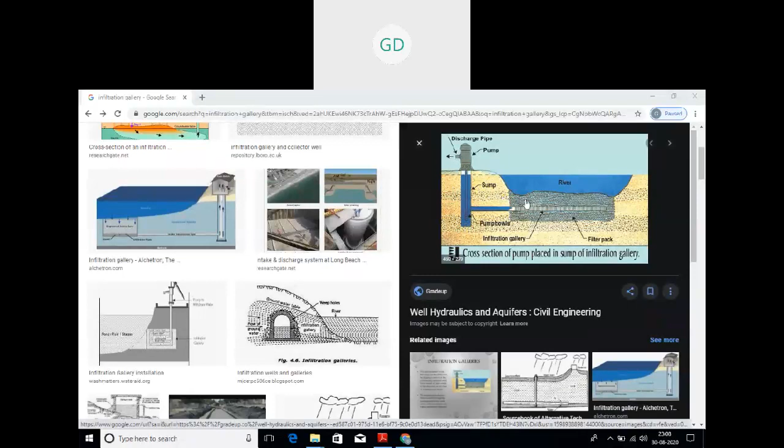So this is the picture, can you see? Here, this part is a river. This is underground, and here you see this tunnel type thing, it is your infiltration gallery. It takes water from the river, the water that seeps through the soil from the river underground, and takes it to a sump tank. From there it is pumped and the water is finally taken out. So that is an infiltration gallery, meaning this is also a source of supply, from there water is taken.

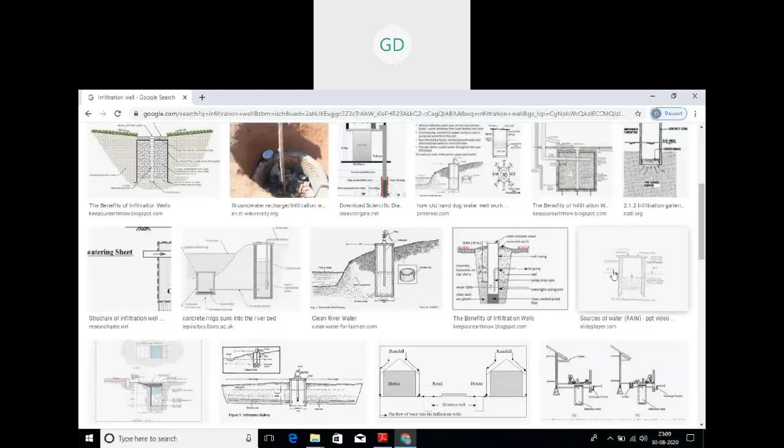Similarly, your infiltration well is a similar thing, but it is vertical. Let me show you broadly, you will learn this in hydrology. This is the section of an infiltration well. Here is the ground level, here the water table is, and this is the water - the lower part is open and the upper part is covered. Here also the water gets accumulated by infiltration, and from here the water is taken to your sump tank and from there it is pumped out.

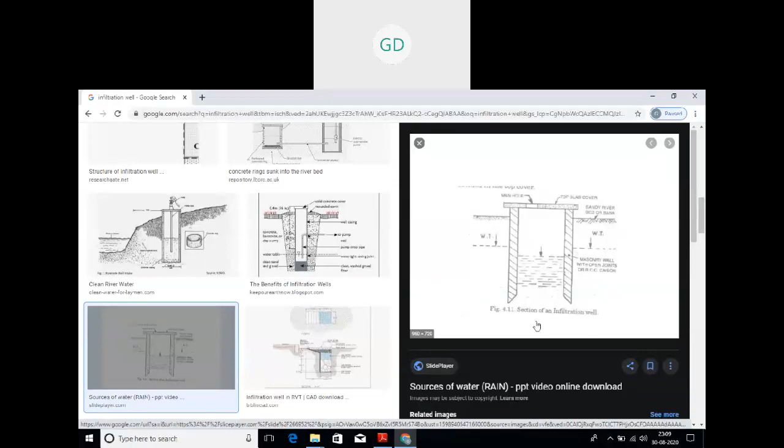So these are your sources of supply, just remember the names. Definitions won't be coming, I guess, but generally you need to know what it is. Wells and tube wells everyone knows, so I won't be explaining this one, you just remember these things. If you want to write it down, you can, or you can take a screenshot, or you can find it in your ERP.

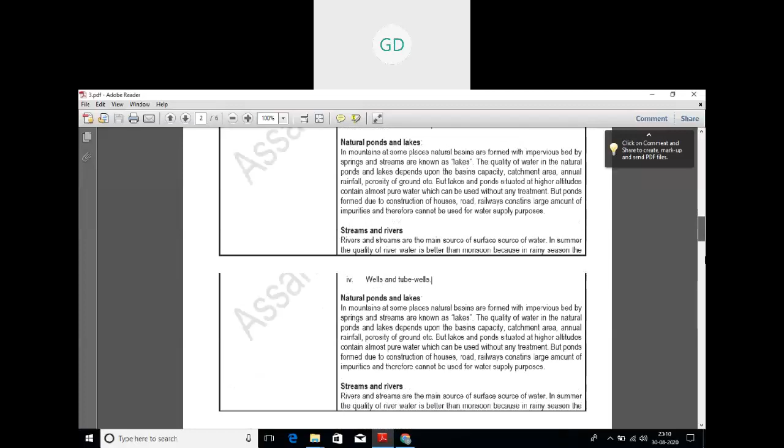Next we will go to reservoir, storage zone, and uses of reservoir. Let me show you in another one, just wait.

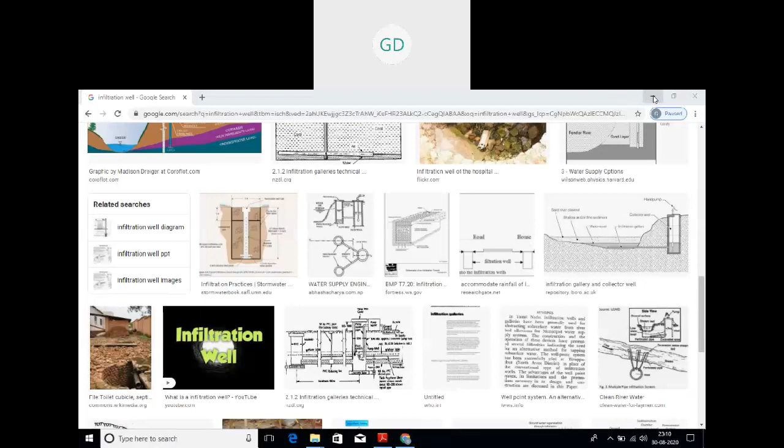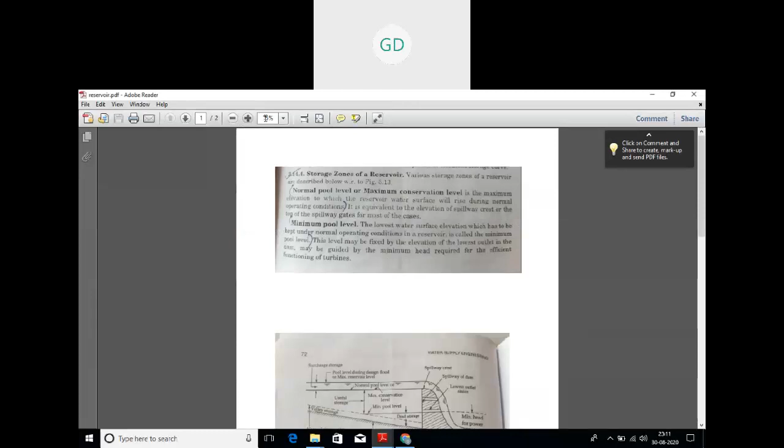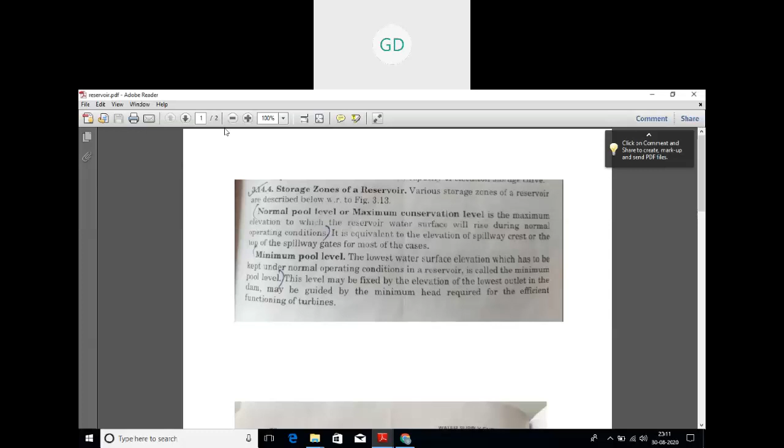So the next topic is storage zones of a reservoir. Please take a screenshot of this one, I have given this from the book. So take a screenshot first, then we will start explaining.

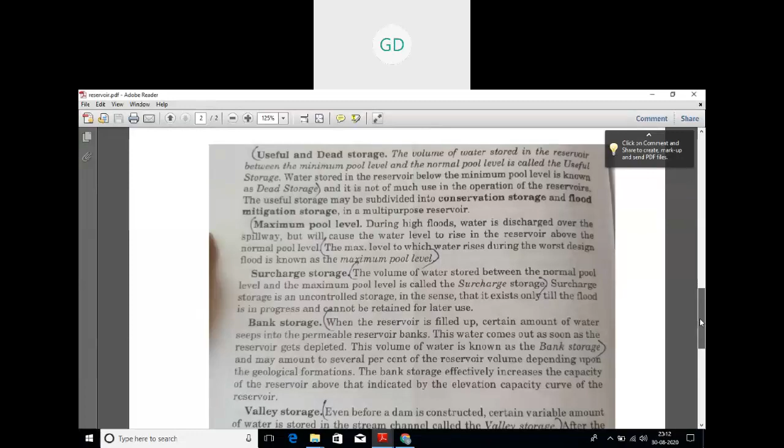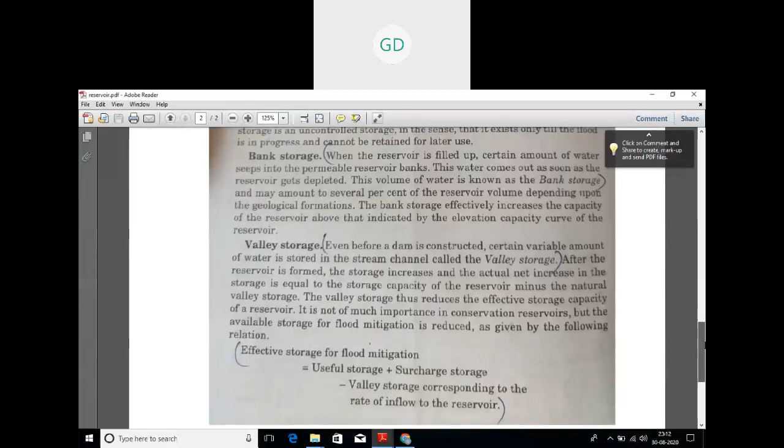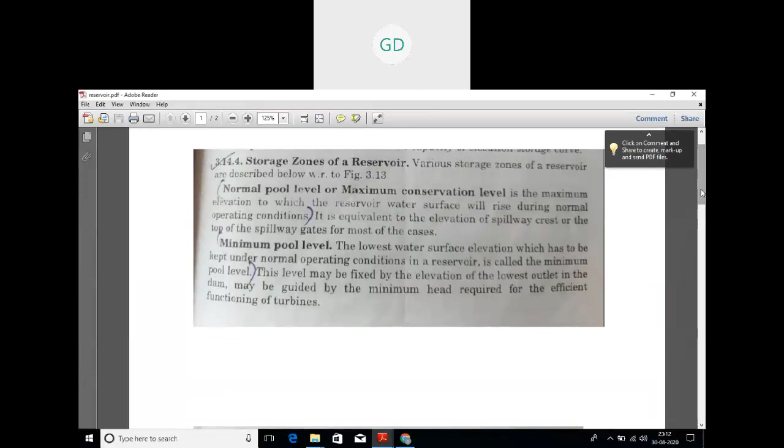So let's see, what is a reservoir we already have discussed. Now let us see what are the storage zones of a reservoir. There are certain zones. So this is your storage, this is your dam - this part, I guess you can see my cursor. So this part is a dam, and we have certain zones here. Let us see what these zones are.

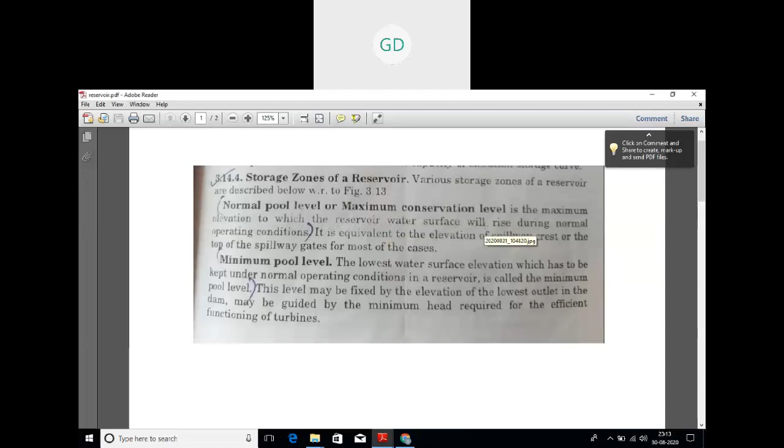The first one is your normal pool level or maximum conservation level. What is it? It is the maximum elevation to which the reservoir water surface will rise during normal operating conditions. Let us see in the picture - here is your normal pool, see this line, this is your normal pool level or maximum conservation level. This is a dam.

Okay, this part is your dam. So up to this part means here it is a water level. In normal conditions also, the water will rise up to here, the water surface will rise up to this line. So this line is known as what? Normal pool level or maximum conservation level.

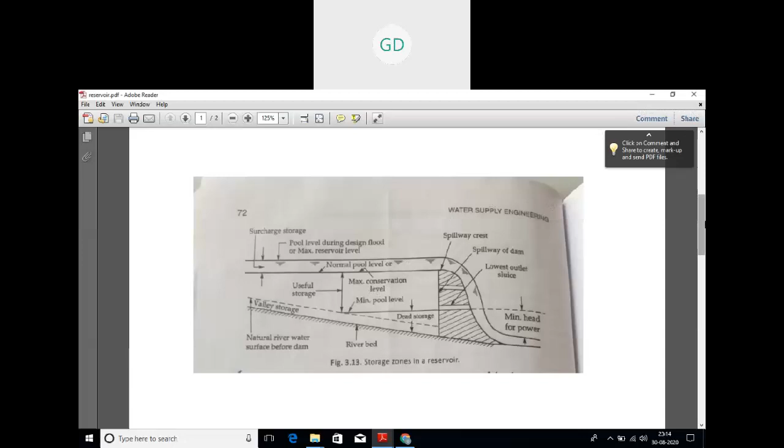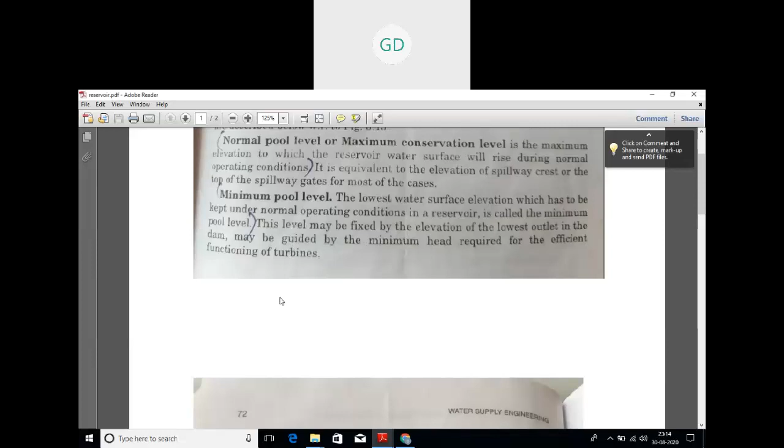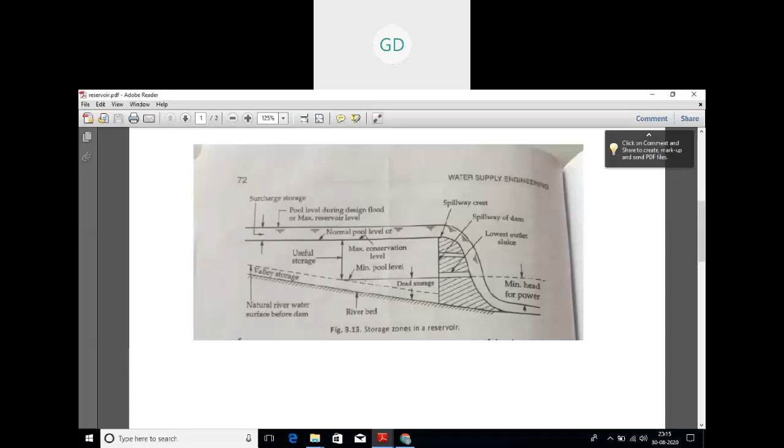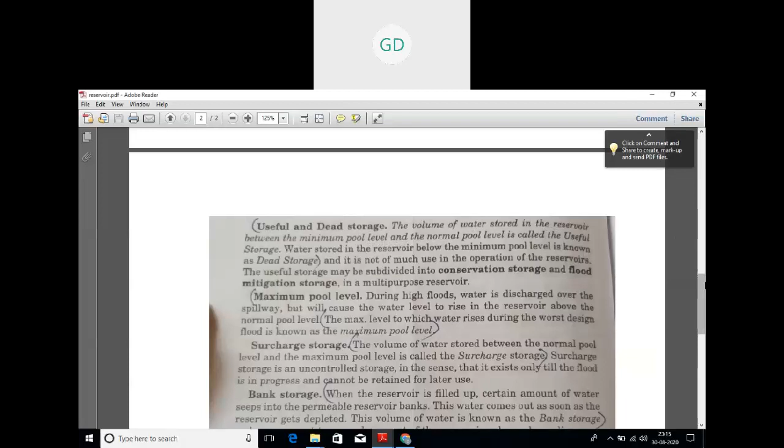Next let us see what is useful storage. The volume of water stored in the reservoir between the minimum pool level and the normal pool level is called the useful storage. This is your normal pool level line, and this is your minimum pool level line. So the volume of water in between is known as your useful storage.

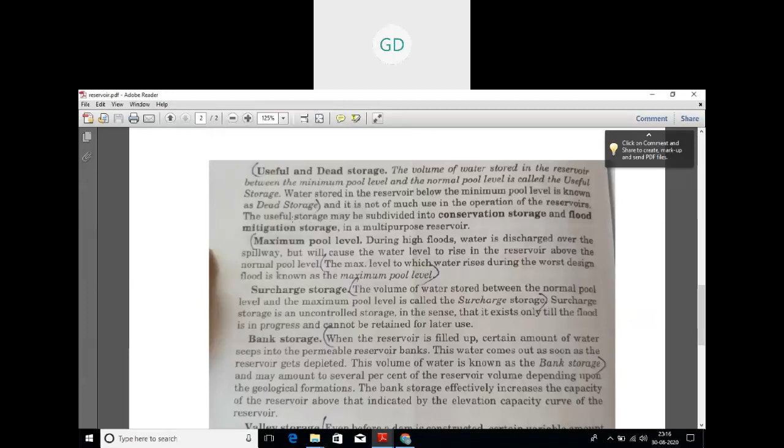Next, let us see what is dead storage. Water stored in the reservoir below the minimum pool level is known as dead storage. The water should be stored up to the minimum pool level line under normal operating conditions. So the water below this level is known as dead storage. That water is mixed with silt, gravel, and all those things, so it is not of much use. That is why it is known as dead storage.

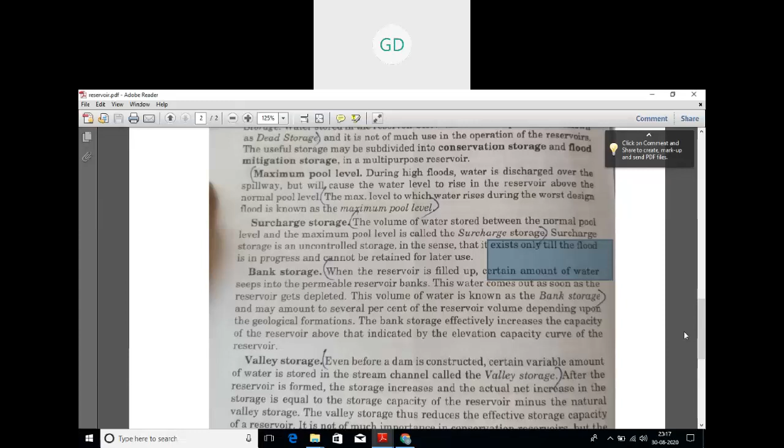Next is your maximum pool level. During high floods, water is discharged over the spillway, but this will cause the water level to rise in the reservoir above the normal pool level. The maximum level to which water rises during the worst design flood is known as the maximum pool level. You can see this line above your normal pool level, overflowing the spillway, which is the end part of a dam. So in the worst scenario, like when a flood is happening, the normal pool water level rises to this level, which is your maximum reservoir level or maximum pool level. That means up to that level the water may rise during the worst scenario like floods.

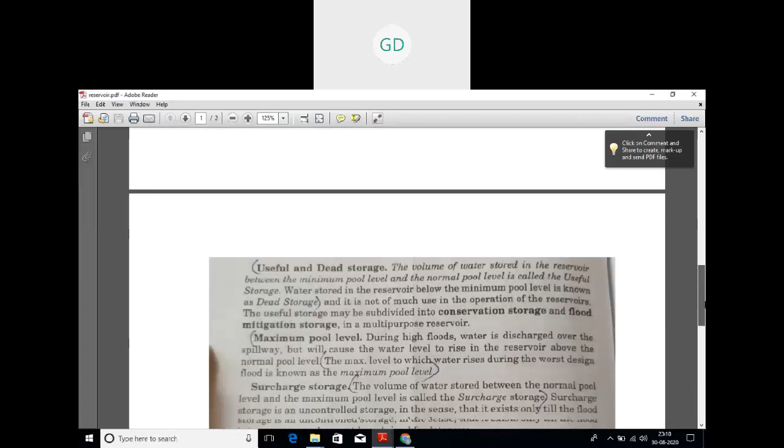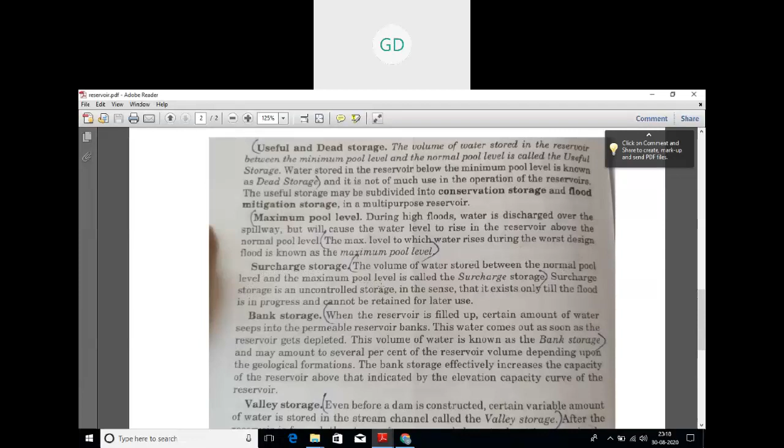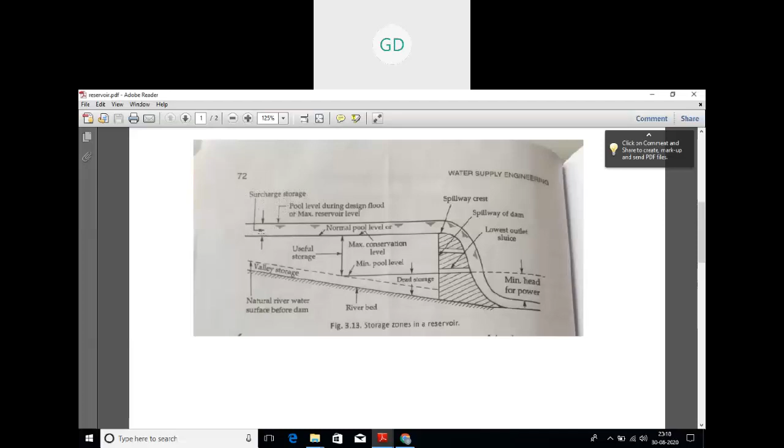Next is your surcharge storage. What is surcharge storage? The volume of water stored between the normal pool level and the maximum pool level is the surcharge storage. Normal pool level is this one, and the maximum pool level is the line above. So the volume of water between the normal pool level and the maximum reservoir level, this part, is your surcharge storage.

Let us see what's next: bank storage. When the reservoir is filled up, a certain amount of water seeps into the permeable reservoir banks. This water comes out as soon as the reservoir gets depleted.

This volume of water is known as bank storage. When the reservoir gets filled up, a certain amount of water seeps into the banks. That water comes out as soon as the reservoir gets depleted. That water is known as bank storage.

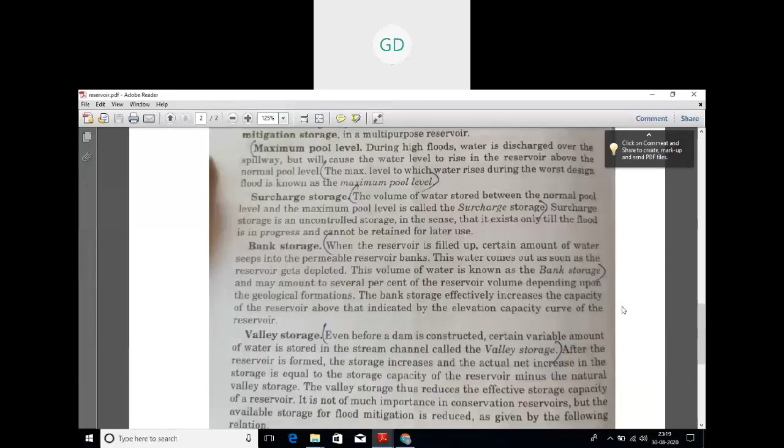Bank storage, I think it is not shown here. It is not shown here.

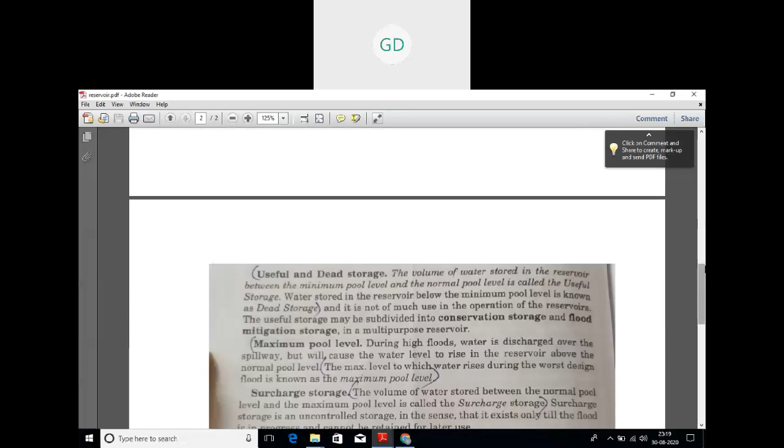Next is your valley storage. Valley storage means what? Before a dam is constructed, a certain amount of water is already stored in that stream, and that is known as your valley storage.

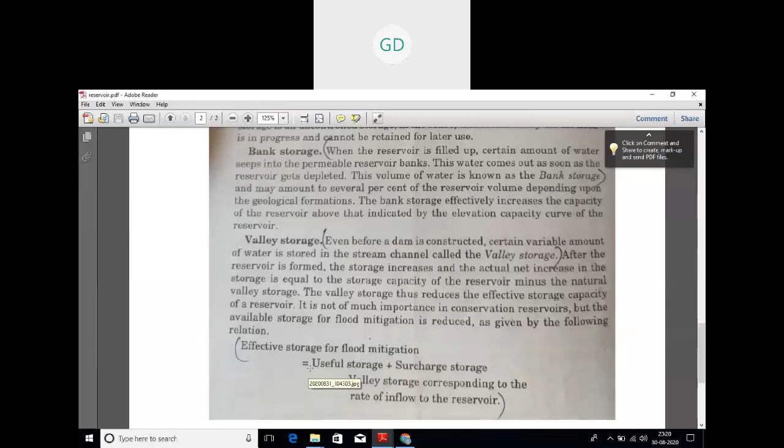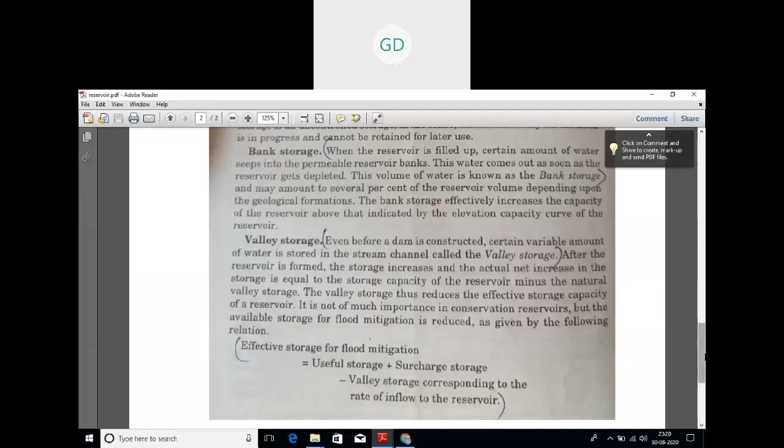And for valley storage, we have one effective storage for flood mitigation formula. In this formula, you can remember these things, you will get in your hydrology, much similar to your hydrology syllabus. So that's all about these storage zones of a reservoir.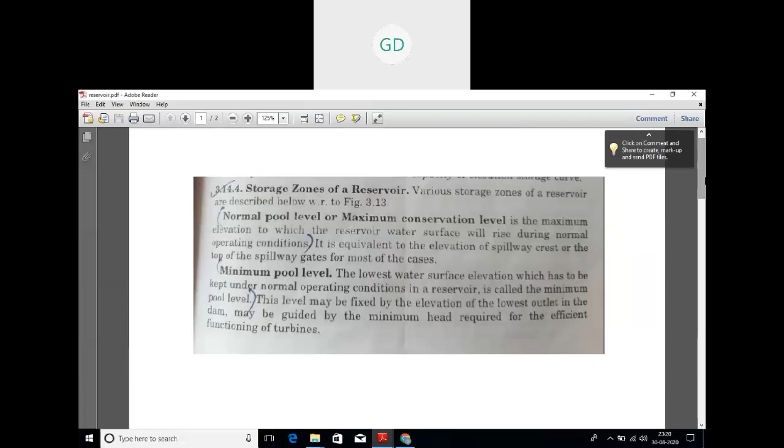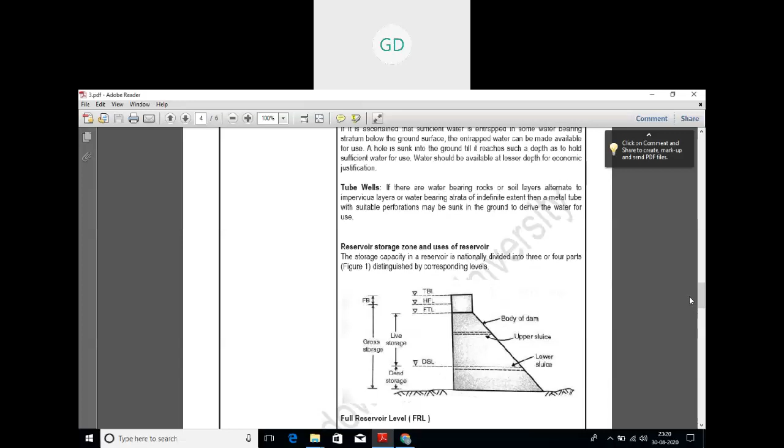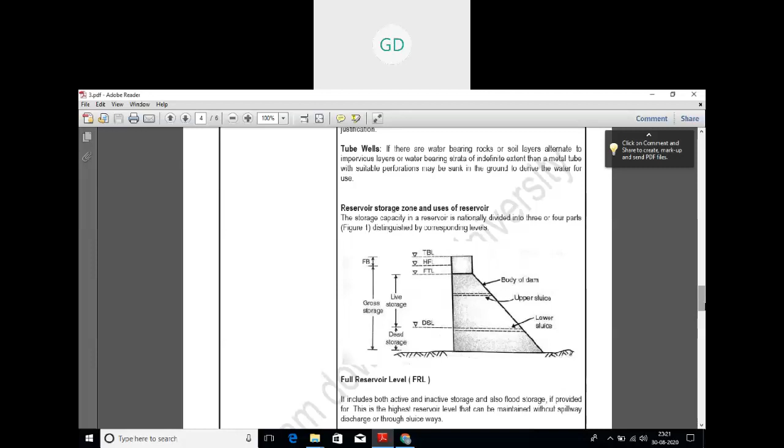Okay, this one is done. Next.

Next is your intakes for collecting surface water. This name intake, I have been using this one from the first class, I guess. So what is an intake? I don't have a picture.

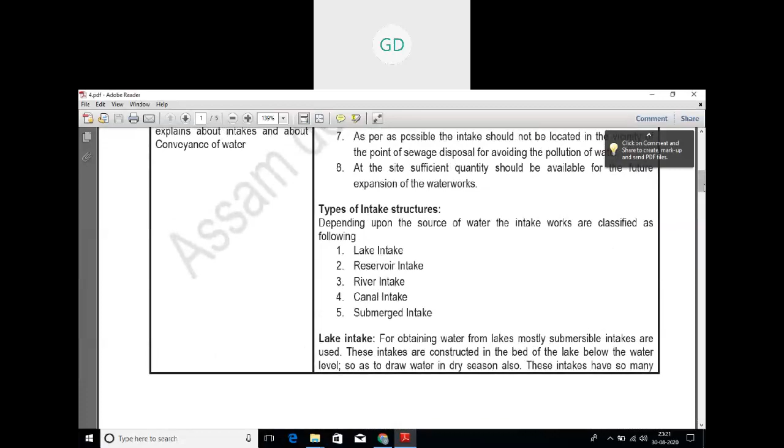No problem. So what is the intake? The function of our intake is to collect the water from the source, and then it discharges it to the conduit. Conduit means it's a pipe. So it discharges it to the conduit and then it is taken to a treatment plant. So the basic function of an intake is to collect water from the source, discharge it to a conduit, and then the water is taken to a water treatment plant.

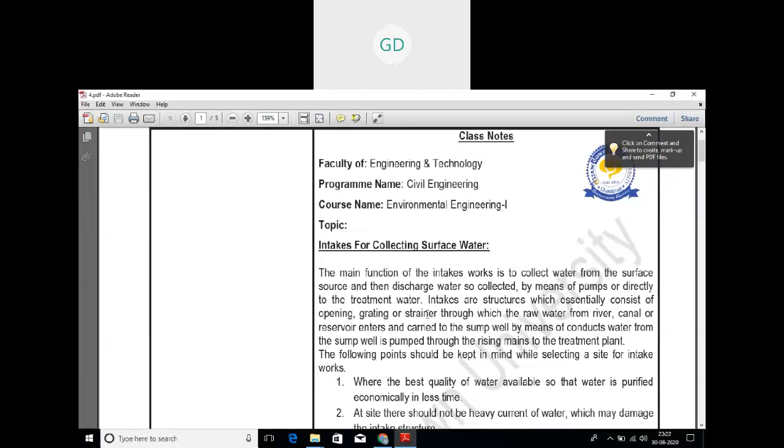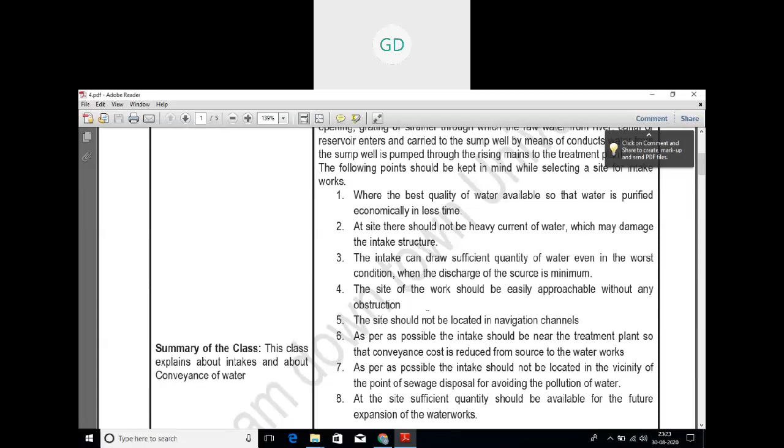So in this chapter, since we have a very vast syllabus this year, we won't be going into details. Just you should know what is the intake, and there are certain points you should keep in mind while selecting a site for intake works. So let us see what are the points.

Where the best quality of water is available, so that the water is purified economically in less time. We should see where the best quality of water is available.

Then at the site, there should not be heavy current of water which may damage the intake structure. The current of water should not be heavy, so that the intake can draw sufficient quantity of water even in the worst condition when the discharge of the source is minimum.

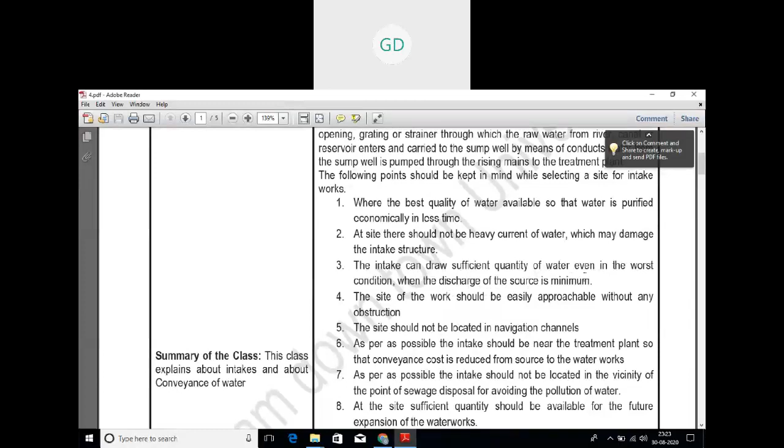Then the site of the work should be easily approachable without any obstruction. I have some better points with me in the book which I have told you.

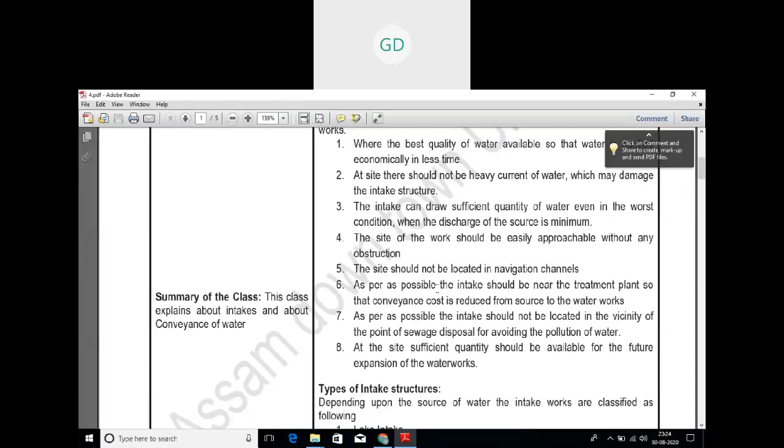So the first point, as far as possible, the site should be near the treatment plant so that the cost of conveying water to the city is less. It is told that the site where the intake work should be carried out, it should be near the treatment plant, so that the cost of conveying the water to the city will be less because fewer pipes will be required, which will obviously reduce the cost.

The next point is that the intake must be located in the purer zone of the source, so that the best possible quality of water is withdrawn, thereby reducing the load on the treatment plant. If you select the site in a purer zone, the water will be pure, so less treatment will be required, and the load on the treatment plant will reduce.

The intake must never be located at the downstream or in the vicinity of the point of disposal of wastewater, because at the point of disposal of wastewater, the pure water will not be there. The water will be dirty, so that's why it should not be at the point of disposal of wastewater.

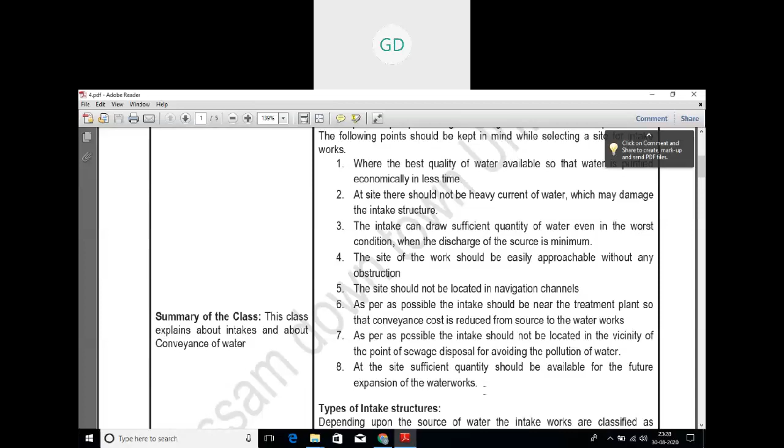These are the points which are written in the book. Similar points are written elsewhere also, but I referred to the book. In the next class, I will provide you one photo and you can take a screenshot. Then, types of intake structures - there are certain types of intake structures. For the time being, you should know the names, you can write them down or find them in your ERP also.